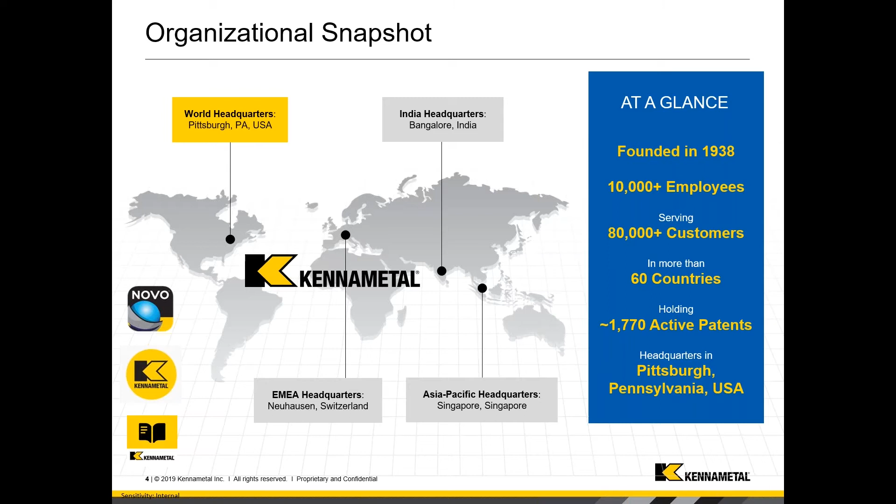But for the sake of time, I would like to go straight to the subject today. So we are going to talk about solid carbide end mills, and specifically roughing, which is the most challenging application. Also finishing sometimes has some tricks or issues, but the roughing is really where we have the highest time in cut, where we need to face some challenges. I like to call them challenges instead of issues or problems, because a challenge we can overtake. So let's see, talking about conventional milling, roughing.

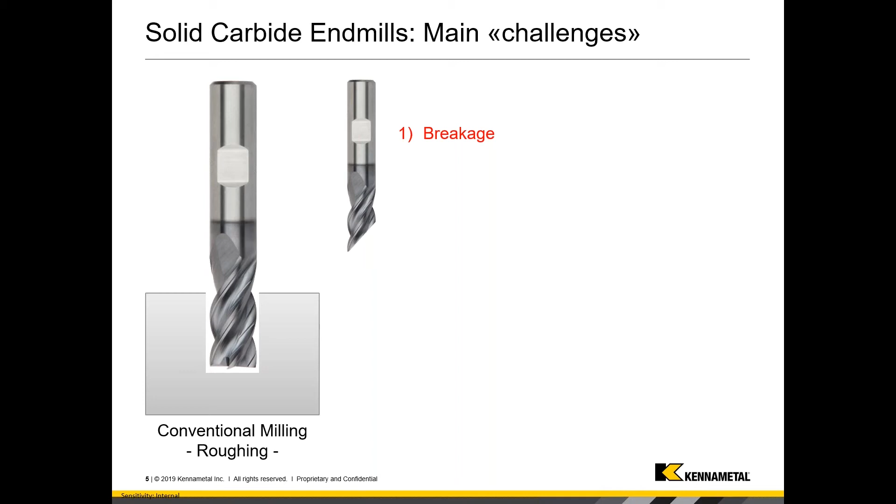I would say the first challenge we have to overtake is the breakage of the tool, especially when we are working after minutes or hours of work. The cutting forces and the wear are going to increase, and unfortunately it's also common to see a breakage with conventional milling. Another important topic is the deflection of the tool. We need to think that the end mill is constrained by a chuck at the end. Let me put my laser pointer to explain what I'm talking about. So we have a chuck here that constrains the end mill. The longer the overhang of the tool, the higher the deflection according to the cutting forces in conventional milling.

Another important topic to be evaluated is the edge stability. When we are doing roughing, especially in full slot, the edge of the end mill is the first to suffer due to breakage or damage of the corner. And of course, this will have an impact on the tool life in general. Then also chip evacuation, especially when we are doing pocketing or internal applications, if not managed properly, could be an issue from the recut standpoint. And if we recut the chip, we go back to the first challenge, which was the breakage.

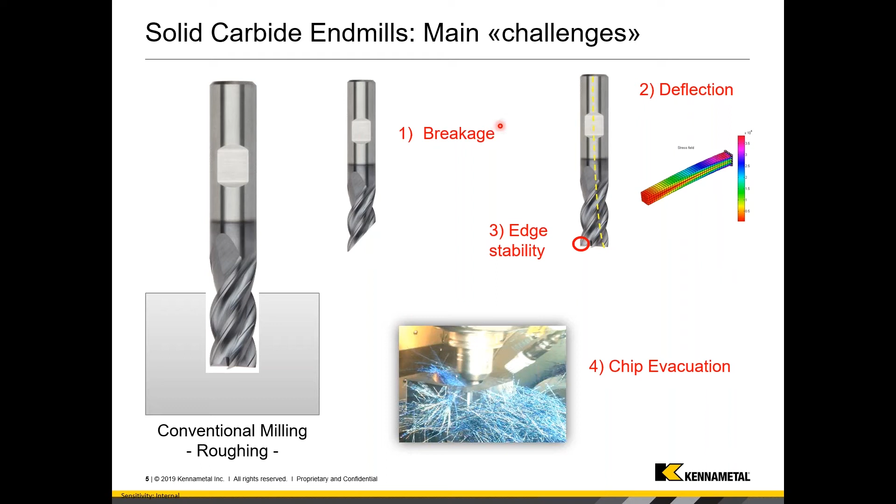Of course we may have other challenges, but I consider these the main four, and we can summarize all these challenges in one single sentence: process reliability, which is very important when you use critical dynamics. Yeah, absolutely. Gianfranco, I like the concept of challenges because we want to find solutions to these challenges. And I know that Kennametal has been looking at these challenges for a while. So could you tell us something about the solution that you are proposing? Absolutely.

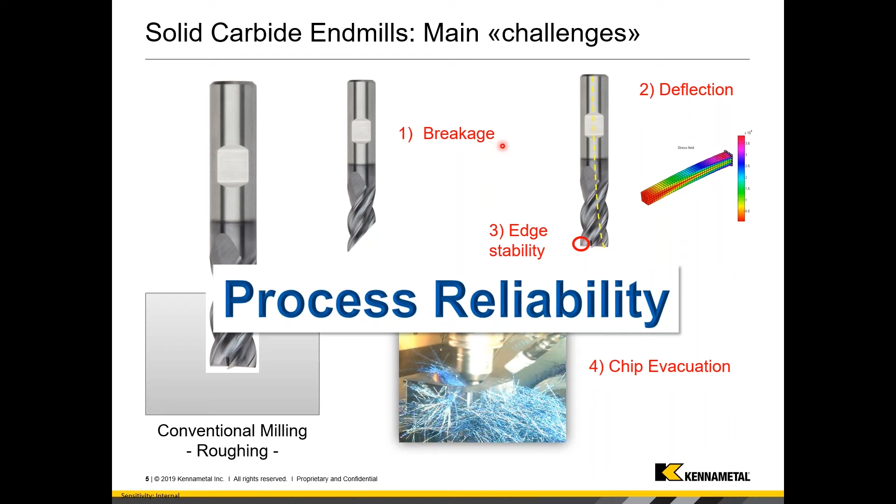So Luca, thanks for introducing the next slide. So we need to keep the focus on the reliability, because reliability can drive productivity and reduce the complexity also. So what we need to do, from my point of view, is change approach. We need to change machining strategy.

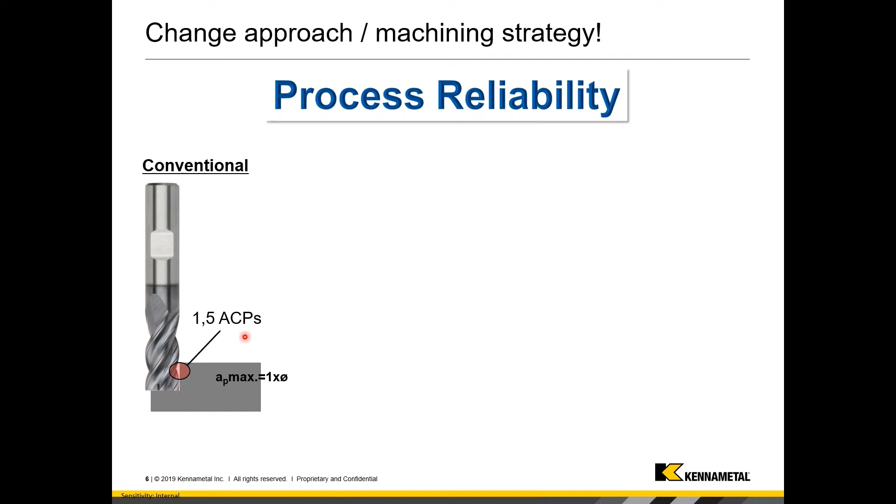So still on the left, you can see a scheme for the conventional milling, where it's clear that we have a large radial engagement and limited axial depth of cut. When I say change approach, that means we need to change the way we machine the workpiece. And this is the perfect introduction of dynamic or high velocity milling, where we basically change the idea, increasing the axial depth of cut, reducing the radial engagement.

In doing this, as you can see here on the benefits of dynamic milling, we can definitely, and it's easy to understand, reduce the cutting forces and reduce the pressure. We are for sure going to reduce the radial engagement, but we are going to use the entire cutting length of the tool, which in the case of the specific tool for dynamic milling, we can push up to 5xD in axial depth of cut.

We are going to reduce the vibration. We are going to preserve the corner stability as well. We are going to reduce the temperature during the application. And all these benefits are listed as a plus against the conventional milling, where the only plus is the bigger radial engagement. At the end, it permits us to increase the feed and speed, so to boost our cutting conditions during the application. That means increased productivity and metal removal rate, as well as process stability.

Another important point: when we go deeper in axial depth of cut, we have more axial contact points, as you can see here. So the cutting edges are more in contact with the workpiece, and this also limits the deflection of the tool itself. So we can list a lot of advantages, but I would like to highlight the cutting conditions, the productivity, and last but not least, of course, the stability and the reliability of the process.

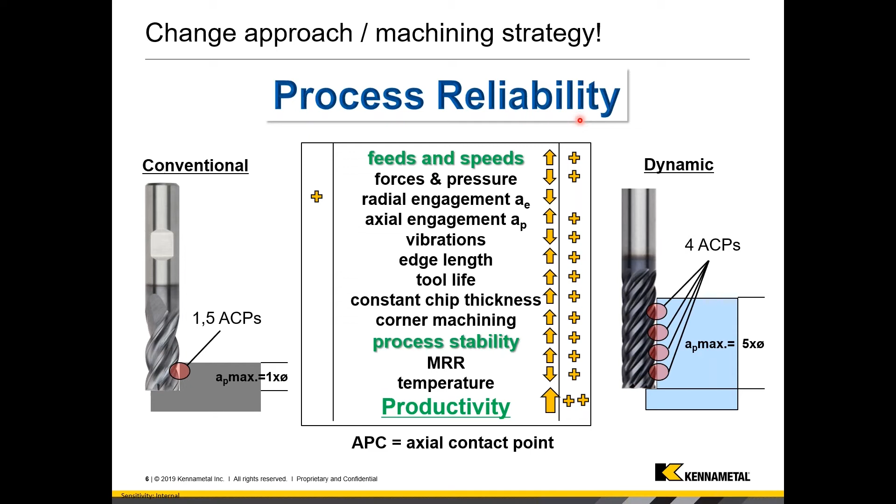Okay, so to explain this, I created the next slide, where we go to the basics of milling. It's not going to be a technical training today, but I think it is important to understand the concept behind the relation between the radial engagement, named ae, the cutting speed Vc, and the feed Vf. There is a relation that links them all together, and it's quite clear to understand. You need to think about the radial engagement defining the time in cut.

If you now see this picture, it's quite clear that when I increase the radial engagement, the cutting edge is in touch with the material for a certain time until it exits the material. So the larger the radial engagement, the higher the time in cut. When I have a higher time in cut, of course, I'm going to increase the friction between the solid carbide end mill and the material. The friction will generate heat, and the heat is going to generate lower tool life. There is really a strict correlation between the temperature generated and the radial engagement.

So using a small radial engagement, I can increase the cutting speed drastically, because the temperature generated is going to be lower. So I can boost the cutting speed. And of course, we know that for the cutting condition calculation, cutting speed is extremely important. Increasing the cutting speed will land with a higher feed at the end of the day.

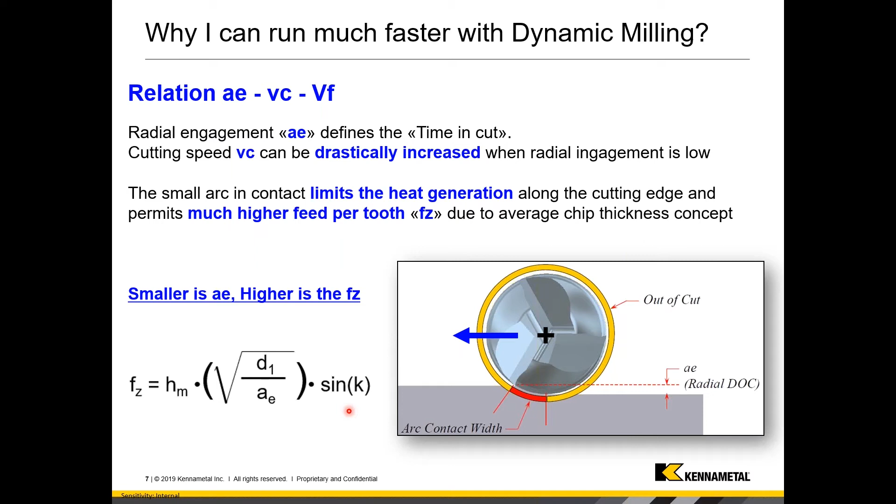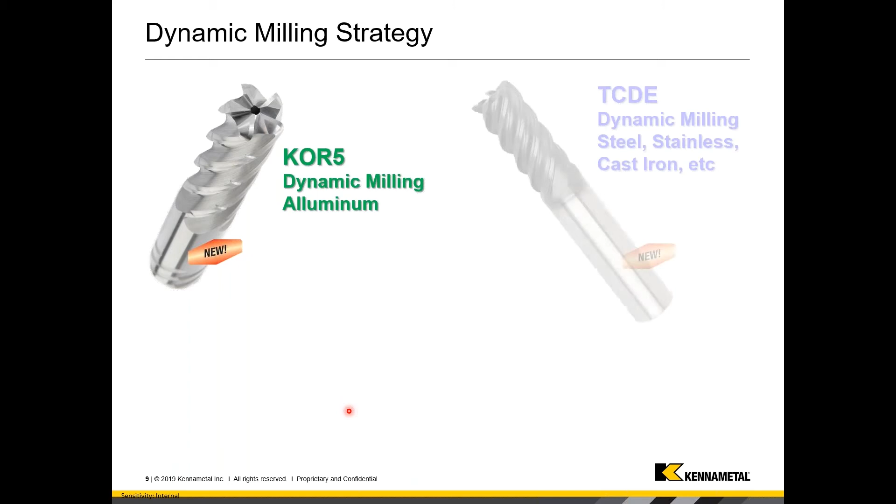So we have the KOR5 for dynamic milling aluminum. It was the first cutter with 5 flutes for high velocity on aluminum. Then we launched as well the TCDE. That was the first dynamic solid carbide end mill launched by Kennametal, and this was our weapon to go on steel, stainless steel, cast iron, so in general on all the materials. So with these two products, basically we can cover all the material that we can find on the market.

But last but not least, as a highlight to give you a pre-information, a new and outstanding cutter is going to come soon. The picture is a little bit hidden because we have not yet launched, but something new is going to come very soon that will help the material coverage. Okay, is it still top secret, or can we have some data about this tool, the release of this tool?

Well, probably I cannot say too much, but in general, if you link the color of the text to the material according to the ISO, you can simply understand that it's going to be a new solid carbide end mill focusing on difficult to cut material, with very unique features. I cannot say more, but let's think about when titanium or nickel-based alloy will be in the arena. So we may have something new. This will be the tool. Okay, got it. Thank you. You're welcome.

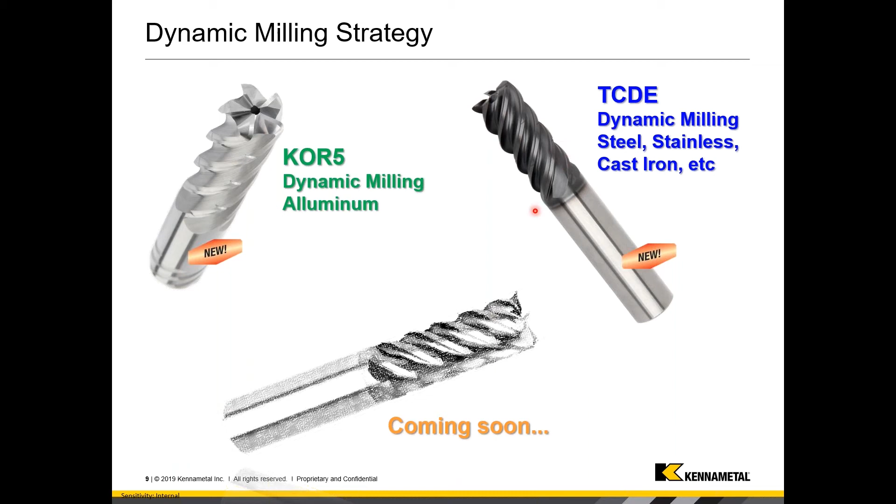Okay, guys. So what I wanted to do very quickly, I would like to provide a couple of highlights on the already launched platforms, the KOR5 and TCDE. As I said, the KOR5 is a kind of unique cutter for aluminum. We have an optimized helix angle of 35 degrees for this kind of material. The length of cut in general is 3 times D, but with a simple custom solution, we can go easily up to 5 times D, but standard is 3 times D.

So we have 5 flutes, unequally spaced. The internal coolant capability especially is a feature very important when we are going to do pocketing. Also the core of the cutter, and this is something very similar when we talk about dynamic solid carbide end mills, is generally stronger or larger compared to the standard solid carbide end mill, because we want to engage more axial depth of cut.

That means we may have deflection, and adding a specific proprietary core design will help us to reduce the deflection. Then, of course, extremely important as well, always something to manage the chip evacuation. On the KOR5, we have chip breakers specifically designed to machine non-ferrous material. On the TCDE, we have a chip splitter, same logic, but slightly different design.

On the sharp edge, we have a sharp edge and the corner radii versions. And on the sharp edge, you also have the wiper facet included, because sometimes it's also important after the roughing to make a kind of finishing application, and you can do that as well using the KOR5. It's not just the roughing tool, which is the main feature of this, but if you want, you can also achieve a decent or good surface finishing.

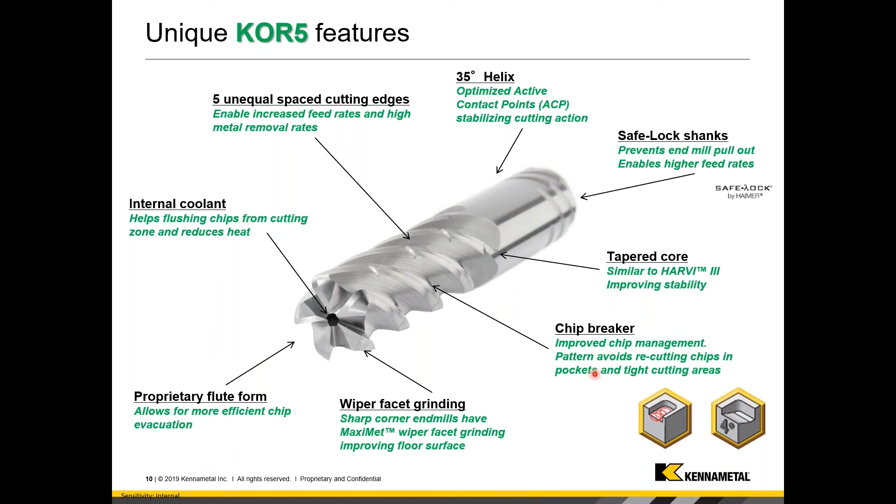Going to the TCDE cutter, it's basically starting from the same logic, 5 flutes, unequal flute. So here we have changed the helix angle from 35 to 40 degrees because, of course, we have higher cutting forces on steel or cast iron, whatever. So that means the higher the helix angle, the lower the deflection, because the helix angle helps you to reduce the radial forces and to increase the axial forces. So less radial force will lead to less deflection.

We have 3 times and 5 times D length of cut. As said before, the core is unique and designed to machine with lower radial engagement. So the suggestion is a maximum of 10% if you want really to go to dynamic or high velocity milling. The cutting edge is stronger. We have a tailored cutting edge that allows us to push the feed per tooth.

And then you have a specific chip former. So think about engaging this tool 5 times D. We are going to create a stress point in the material, and we are going to better manage the chip evacuation, producing 5 different chips instead of a very long chip following the helix. Okay. So also here, we don't have the center cut, but we have anyway the capability to go ramping up to 4 degrees.

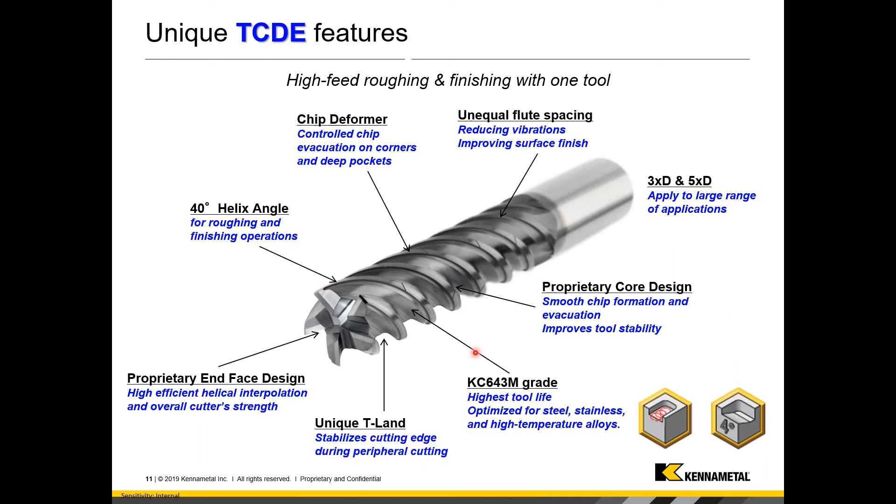Everything is good on the slide, without a doubt, but what we wanted to do for this webinar today is also demonstrate what we are talking about in collaboration with ESPRIT. We created a demo that I named from the slide to the real chips with the TCDE. So we are going to machine a P3 material, steel 4140, with a 4 flute solid carbide end mill, still Kennametal. So maybe you know the name RV1, diameter 12, with conventional milling, and make the same application using the ProfitMilling of ESPRIT software with the TCDE, the last cutter we saw before, diameter 12.

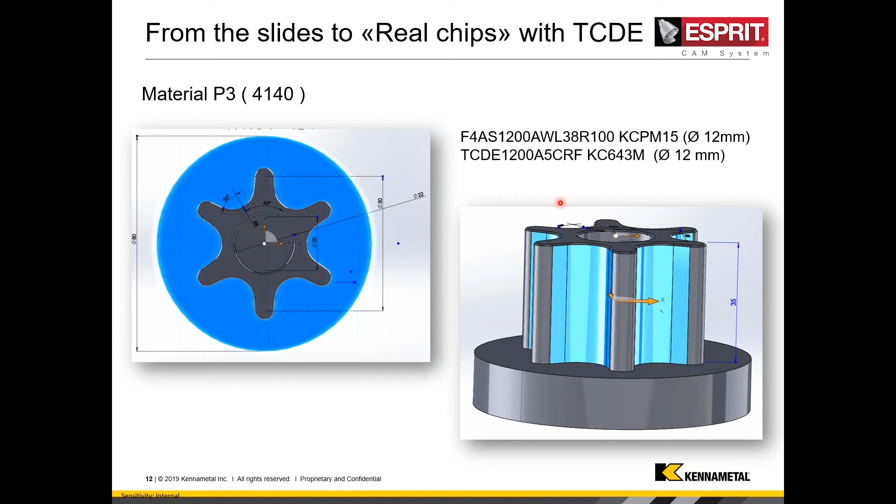As you can see, we try to maximize the length of cut according to the diameter. So it will not be possible to do one single pass with the conventional milling. So we are going to see how it works. Okay. So let me put this video without sound because you anyway will not be able to hear. Okay, these two videos will start simultaneously, and then we can debate about the cutting conditions.

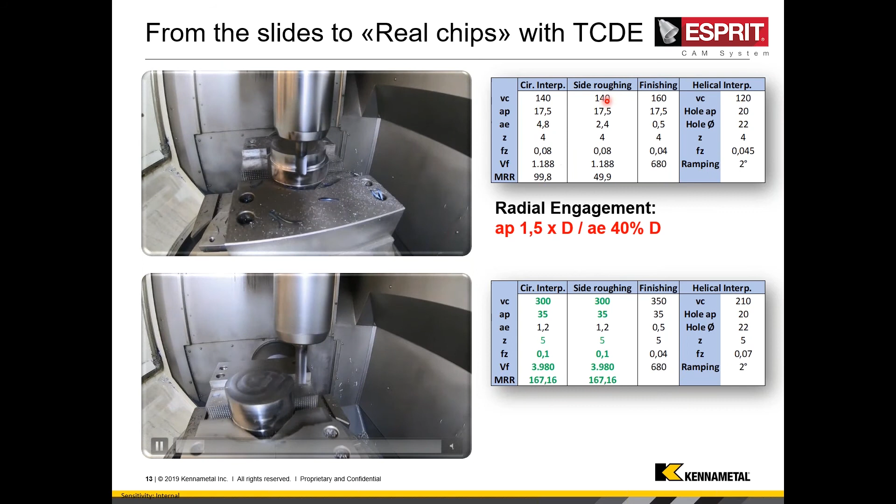So on top, you can see the conventional milling. And for the conventional milling, of course, we didn't want to use very conservative cutting conditions, okay? So we are going to use really realistic parameters: cutting speed 140, depth of cut, considering the 12 millimeter cutter, is 1.5 times D axial depth of cut with a 40% radial engagement. It's a pretty challenging application, okay?

On 4 flutes, 0.08 millimeter per tooth. So the feed is around 1,200 millimeter per minute, which is a pretty decent application, okay, in terms of cutting speed and feed. So if you see here where the TCDE is right now, it's already above that type of application.

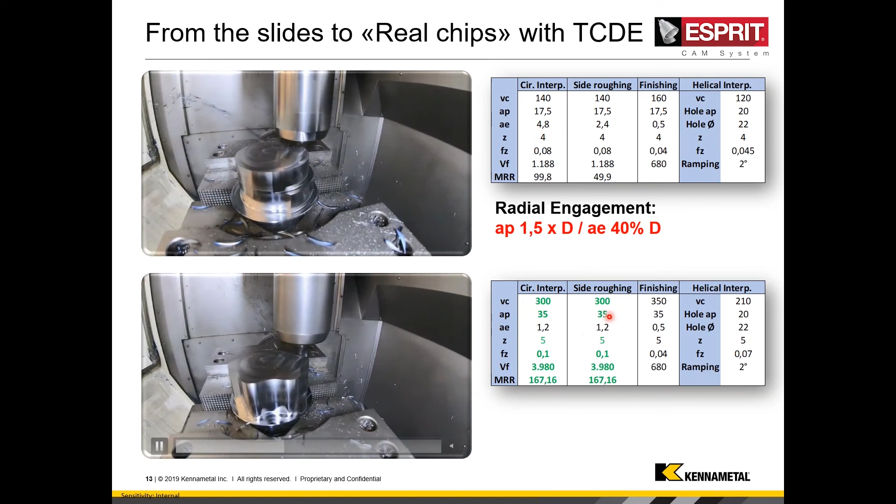Because we can do what I was explaining before, so 300 meters cutting speed, full depth of cut, 10% radial engagement, of course, adding one tooth more, 5 versus 4, we can push even more. The feed per tooth is 0.1, which is also still conservative, we can push more. So we basically pass from 1.2 to 3.9, almost 4,000 millimeter per minute, having a great advantage from the material removal rate standpoint.

So you can see here, and unfortunately, on the conventional, we also had to divide the radial engagement in doing this kind of application, because 40% radial engagement on this application specifically was too high. So we decreased to 20% to be on the safe side. So basically, we are almost at the end.

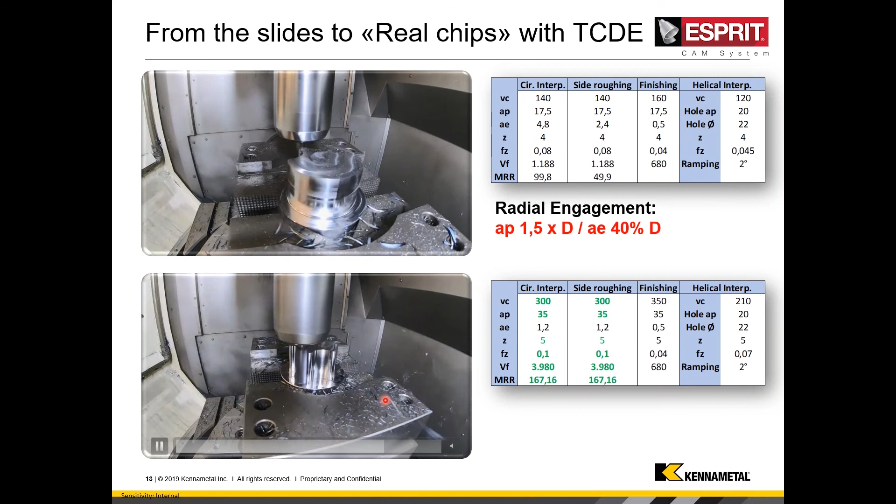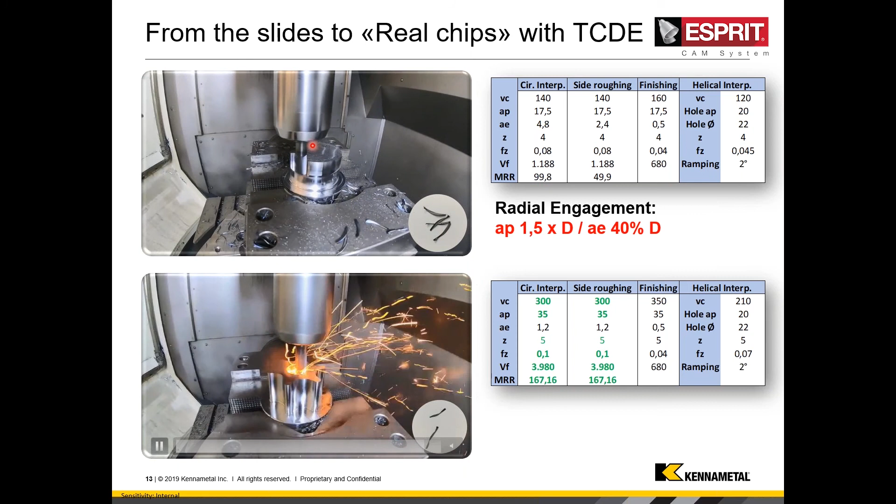And then my partner, Andrea, will explain exactly how we made the program here to really boost the dynamic milling. Now the last application is doing the helical interpolation. So it's important also to mention the dimension of the chip. On the external, you don't have any issue. But if you do pocketing with a large chip, it could be a problem for the chip evacuation. When we are dynamic, we are producing very small chips.

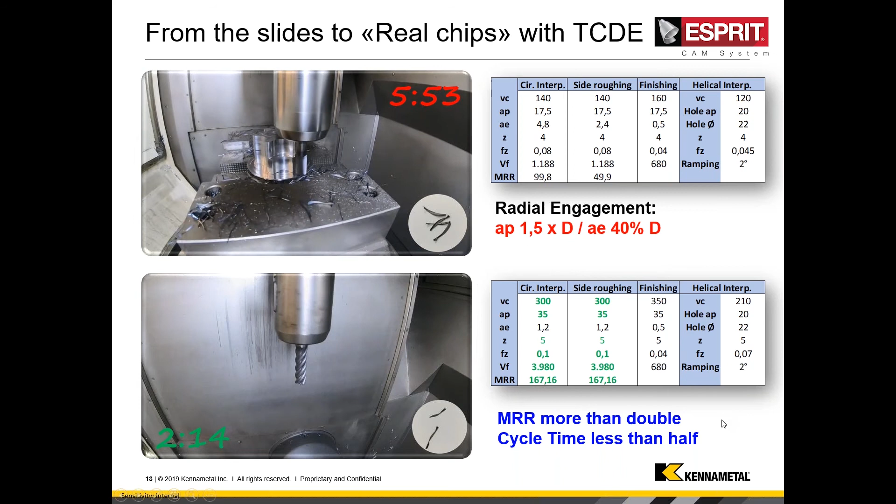So in total, the dynamic milling application was done in 2 minutes and 14 seconds. Here, of course, I'm not going till the end because it's quite long, but we know already that the time to make the same part will be 5 minutes and 53 seconds. So as the takeaway, more than double metal removal rate compared to the conventional milling, and less than half cycle time. So there are really a lot of advantages.

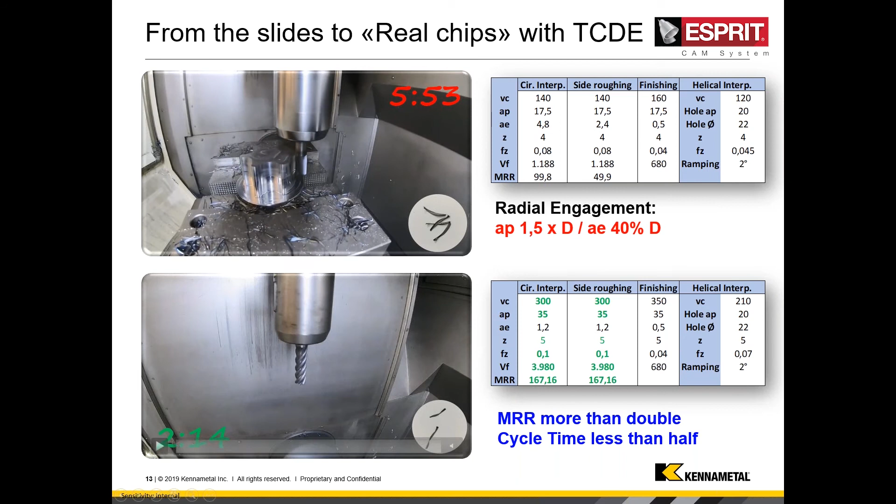And of course, here we are not measuring the tool life, but I am quite sure the tool life is going to be much longer also with the dynamic milling. So not just this, but also plus the tool life.

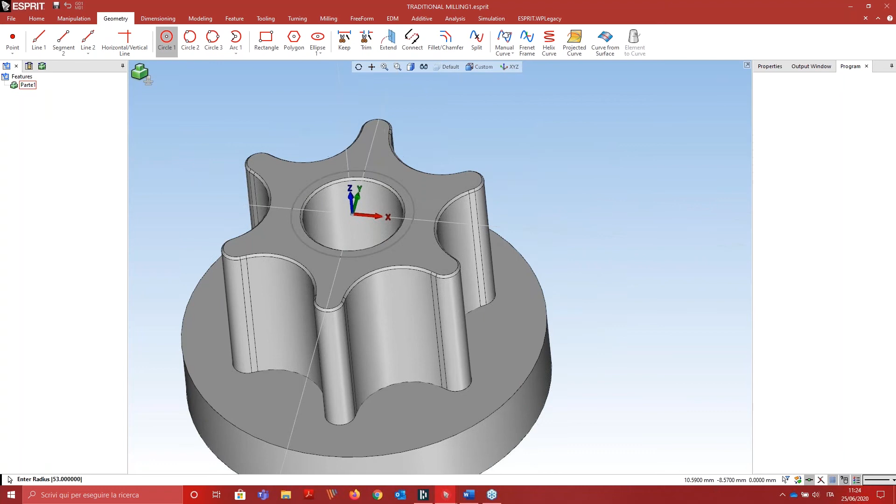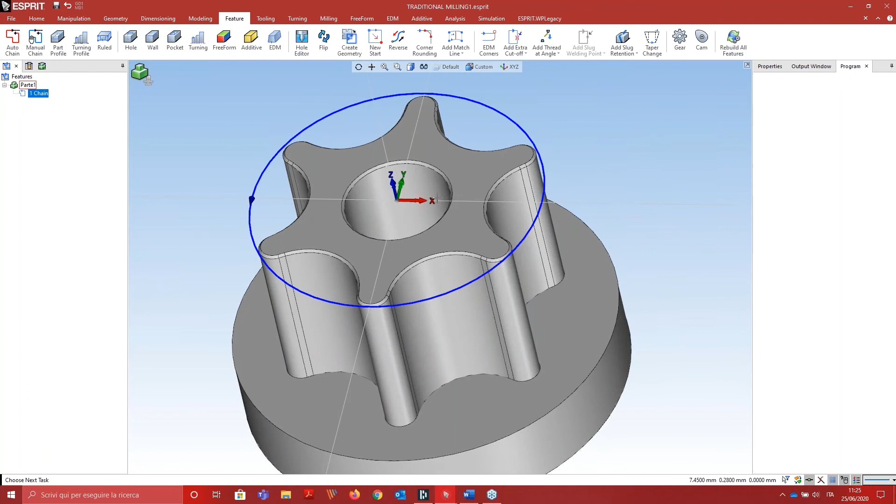First of all, the first operation is a circular contouring operation that you saw in the video. I make geometry for this, for example, from the center. Okay, this is the circular feature to make my operation chain, and I program this contouring operation from scratch. I program with traditional milling. I set default to all my parameters, and I make circular contouring. Okay, I choose my tool.

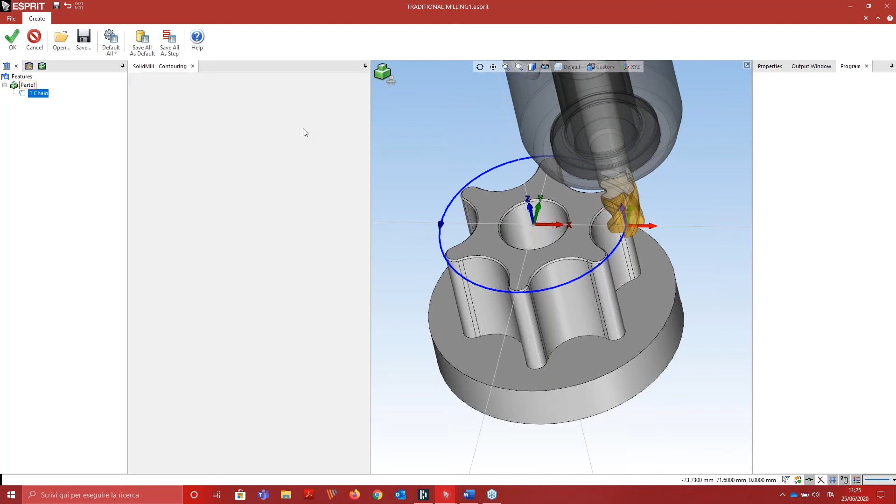It's a four cutting edge tool, end mill. Of course, you can see the preview of the tool and the tool holder also, the shape of the tool and also of the holder. Cutting parameters like this, 0.08. And I want to use the stock automation for calculation.

The strategy, I have to manage the step over. I take 40%, which is 4.8 of step over, and I want to have 35 of depth with 1.5 times the diameter as incremental depth. Okay, and calculate.

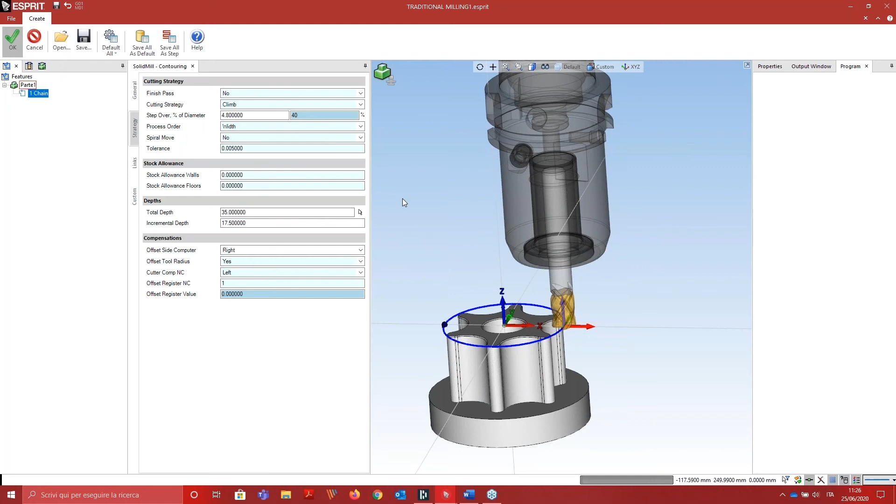I have already mounted my fixture and workpiece on the machine. I have used a DMG Mori DMU 75 monoBLOCK. You can see the machine. For ESPRIT, the simulation is very important because we have exactly the real machine. We have a digital twin of the real machine. It's very important to avoid collisions and to avoid eventual out of stroke in the operation.

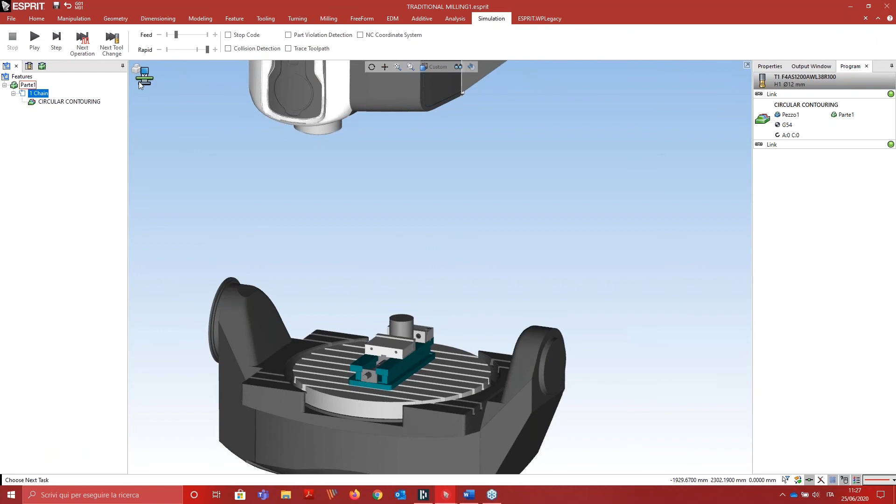Okay, let's start with simulation, like the video you saw, the tool, and start. On the right of my screen, you can see the axes, like the control of the machine, and also the elapsed time to have an idea of the cycle time, and the value of the axes. You can see also the feed motion, the feed rate.

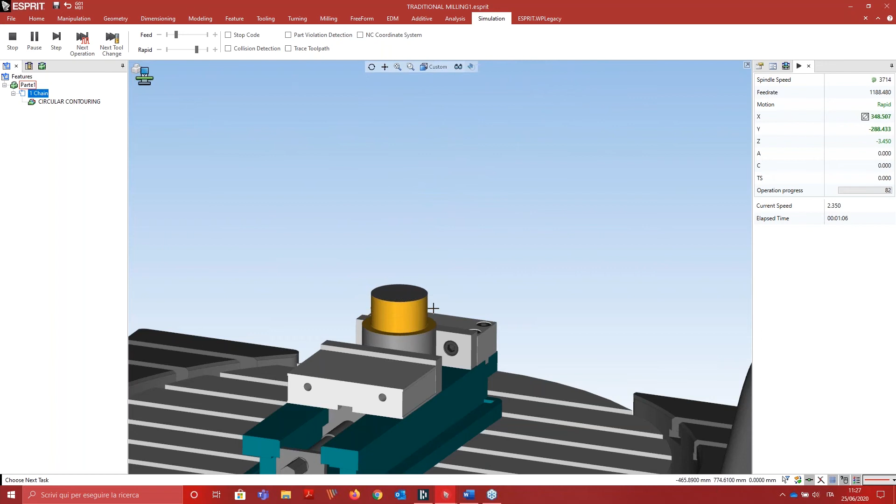There is a difference between this program and the video you have seen. I changed the priority of my work. It's not width but depth. Okay, directly on simulation, and I have the contouring operation equal to the video. Accelerate a little bit and so on. Okay, just 1 minute for this operation.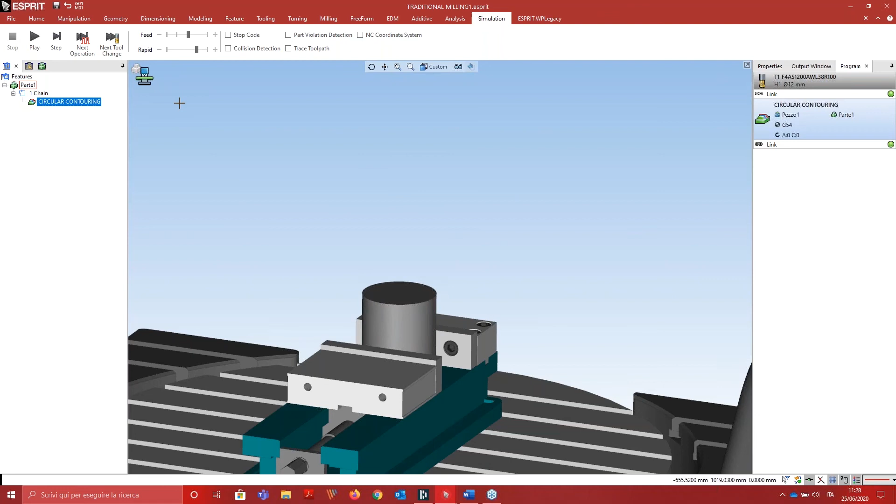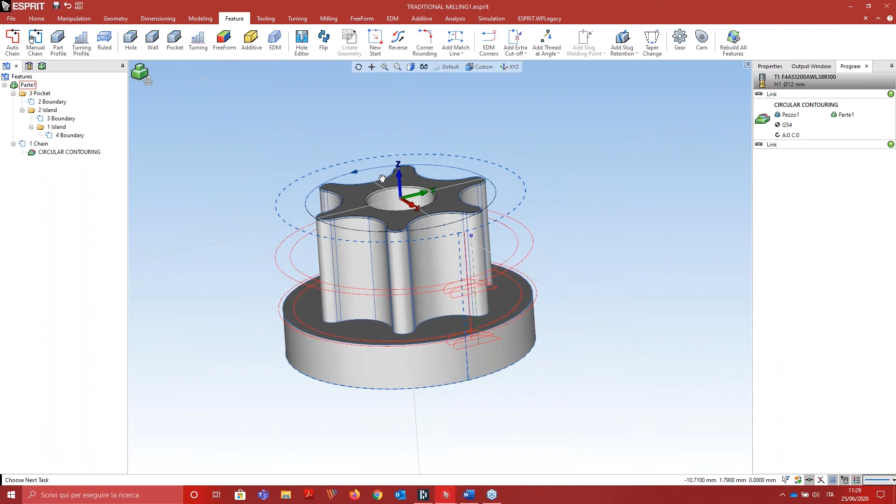Now I want to remachine the lateral side of the workpiece. I choose the whole solid model, and I have a pocket feature, and in this the system automatically detects the geometry of my part. I have all the geometry of my part, and I can erase this hole. I have to make it later with a spiraling cycle.

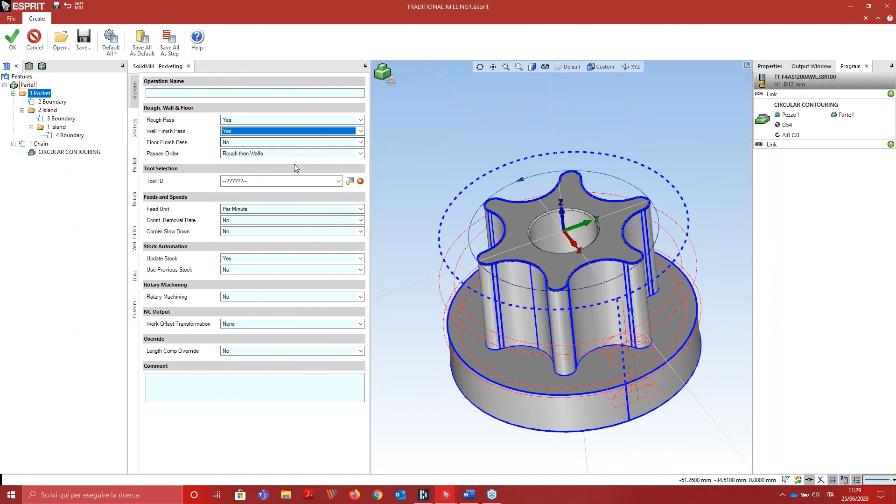Okay, milling of this with a pocketing cycle, and I set default to all parameters, and I choose to rough this, and also a wall finish pass in my strategy. I choose the same tool. As usual, I have the preview of the tool, and I use the stock automation also. And for the strategy, I choose concentric in. Total depth equal 35, and the incremental depth equal to the contouring operation. In the rough, I have parameters.

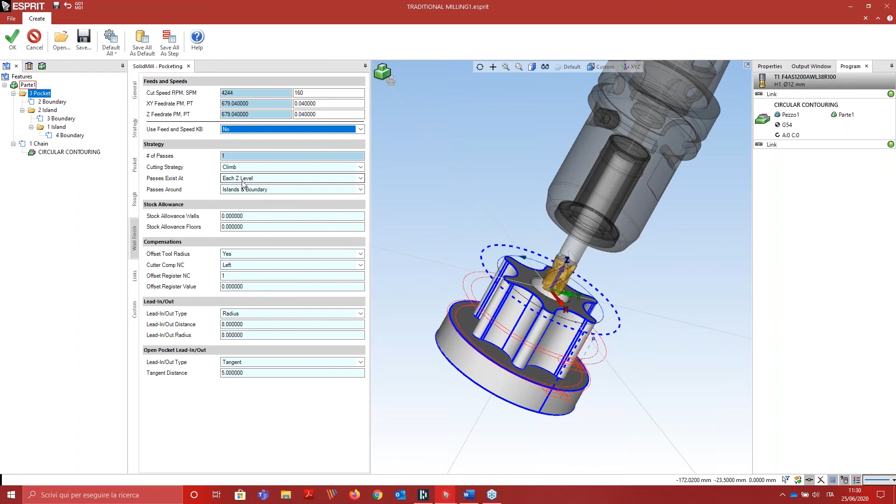Okay, and I change the radial engagement. I change the step over for the radial engagement, 1.2, for example. Stock allowance 0.2 for a finish operation, and parameters for the finish operation automatically in the same cycle, 0.04 and 0.04. Okay, and I want to make a finish pass at each Z level of the roughing. I validate. Okay, and I have my cycle.

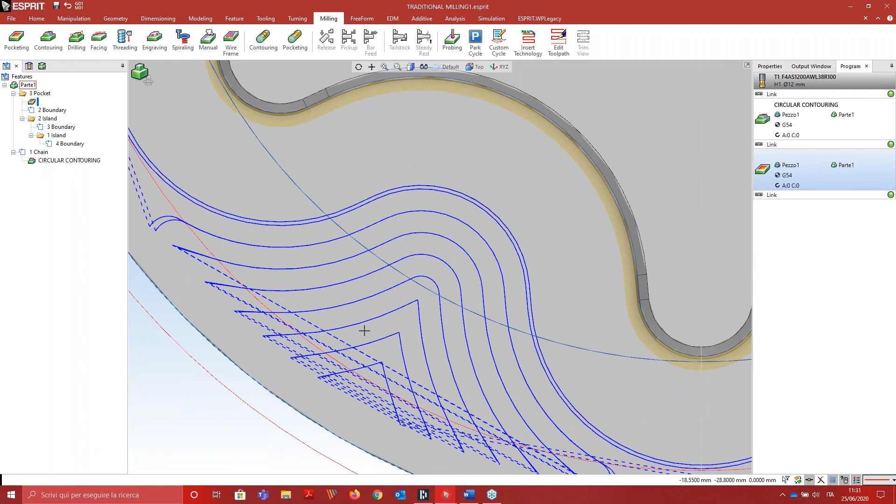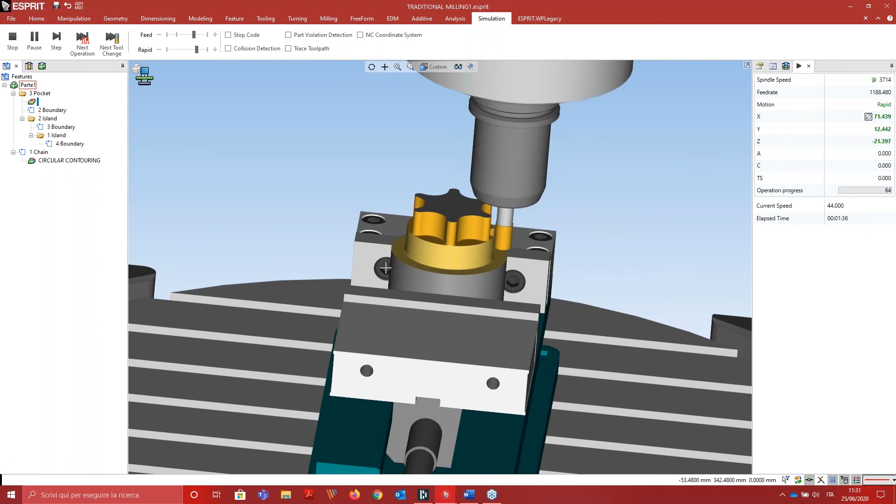You can see the shape of the movement. You can see here a sharp corner in the movement of the tool for the first movement of roughing, but now directly on the simulation. Okay, I have the same tool, but you can see different color for a better visualization of your work. Okay, I can increase my feed rate. Okay, and the second depth. This operation is a little bit long. Okay, finish pass, and so on.

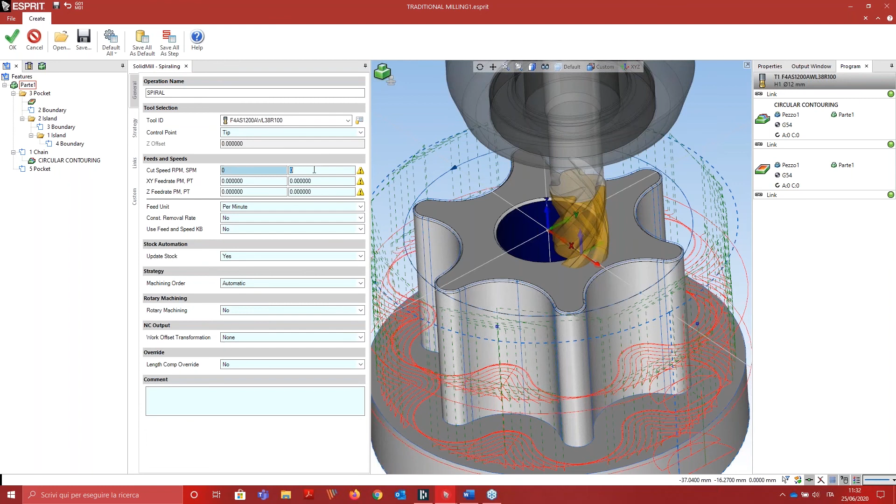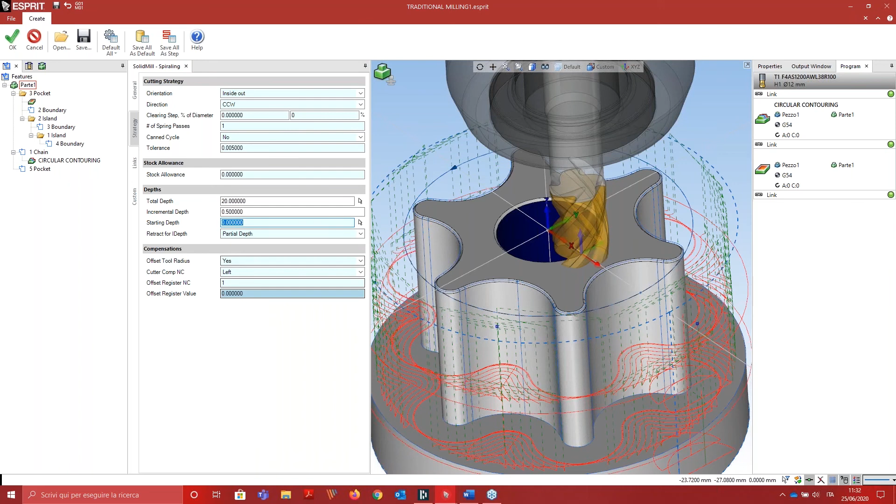The last operation, I want to machine this with a spiral milling, spiral cycle, and it is very simple. I have only to define my tool, for example, the same tool, parameters 7 and 0.07. And simply I have to decide the depth, of course, 20 millimeter, for example, and the incremental depth or the angle for the spiral, 0.5 incremental, and go. And I have the spiraling cycle.

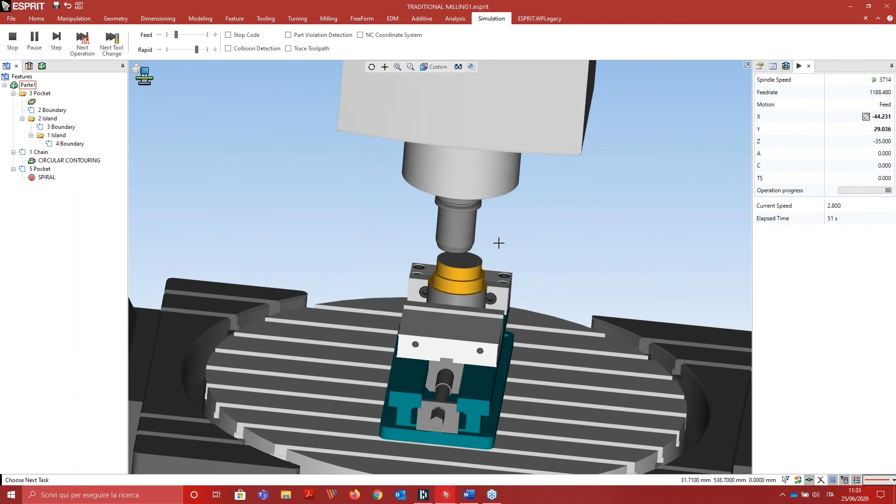And now I can simulate the whole process. Okay. The movement between the tool change and the workpiece is automatically calculated to avoid collision and to have the better tool path related to the movement from tool change and to tool change. I accelerate my simulation. And at the end, we can see the elapsed time of my process. Okay, let me accelerate it a bit. Okay, now the spiraling cycle.

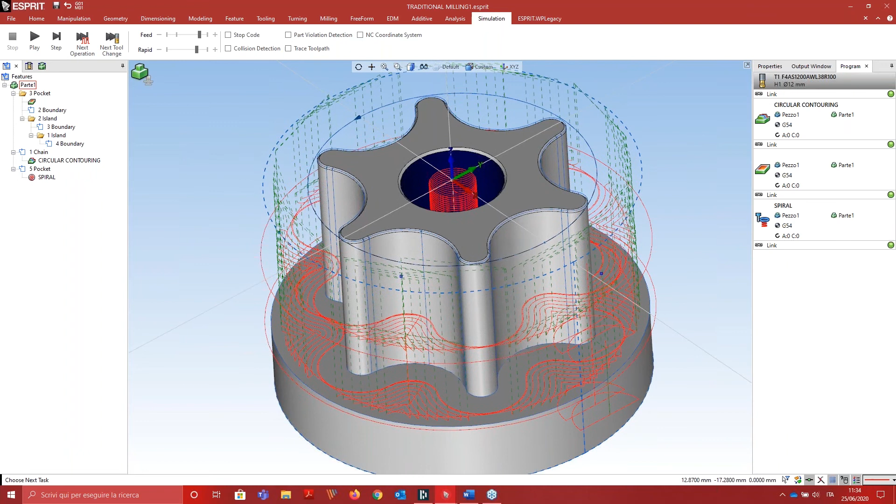Okay, it's done. And you can see the elapsed time at the end of all operations is 5 minutes and 53 seconds. Okay, now we have to optimize this cycle time with dynamic milling. Dynamic milling in ESPRIT is named ProfitMilling. ProfitMilling is a patented cycle of DP Technology. To do this, I can erase my circular contouring, and I want to modify my rough operation.

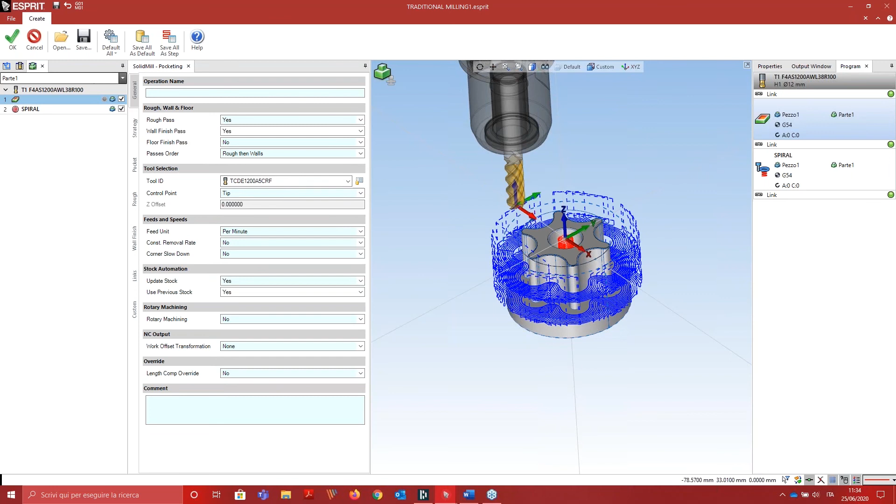Okay, I simply change the tool with a TCDE tool, and I change the strategy, not concentric in, but I choose the ProfitMilling. Okay, the system automatically manages the parameters for ProfitMilling. I just have to decide the incremental depth. I choose all the cutting length, 35. In the rough, I have another important parameter. I have to change parameters 300 and 0.1 per tooth.

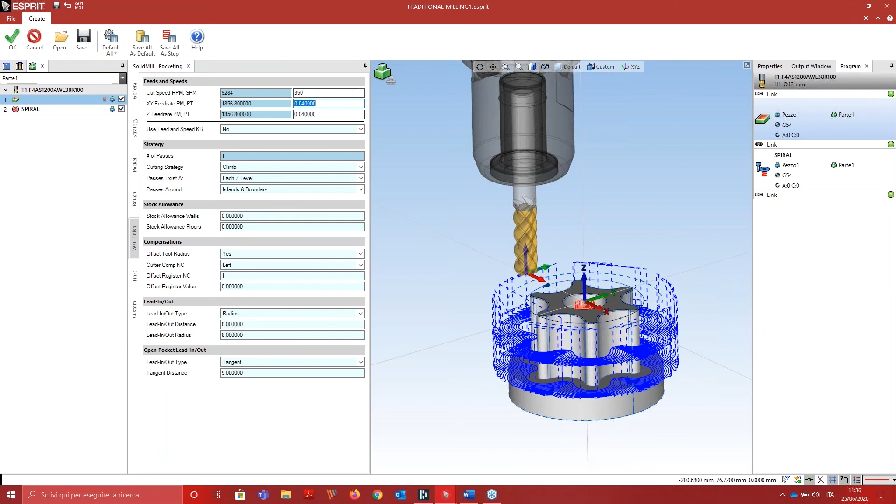Okay. I have a maximum feed rate, and I have another important parameter. This is the engagement angle. I can change the radial engagement, or I can change the engagement angle. For example, 37, and automatically the engagement changes. Okay. I have the same stock allowance, and I change the parameters also for the finish pass. For example, with the same feed per tooth. Okay, I validate. And now you can see the ProfitMilling cycle.

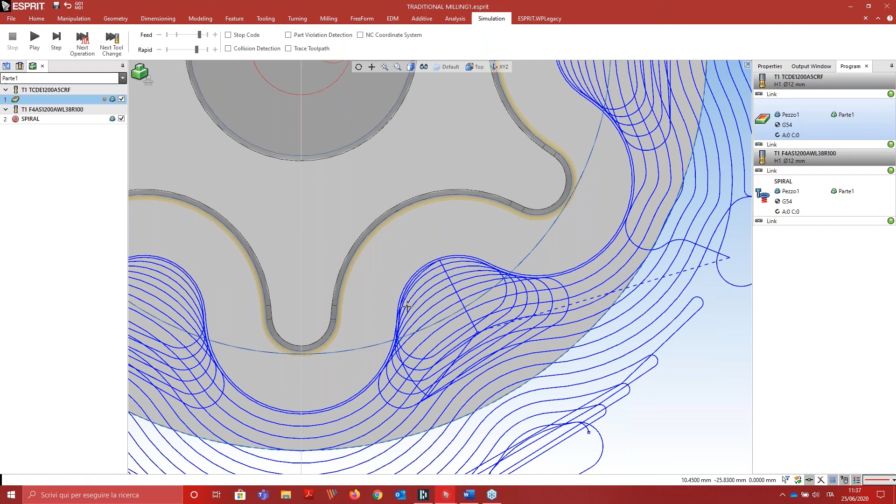What is ProfitMilling? It's a roughing strategy. It's a high-speed material removal cycle. And with this cycle, you have a smooth tool path, and you can have a significantly deeper, faster, and more efficient cut. And we have the possibility to reduce the wear on the tool and on the machine. How does it work? How is it possible to reduce the wear? Because the ProfitMilling cycle reduces the heat on the tool.

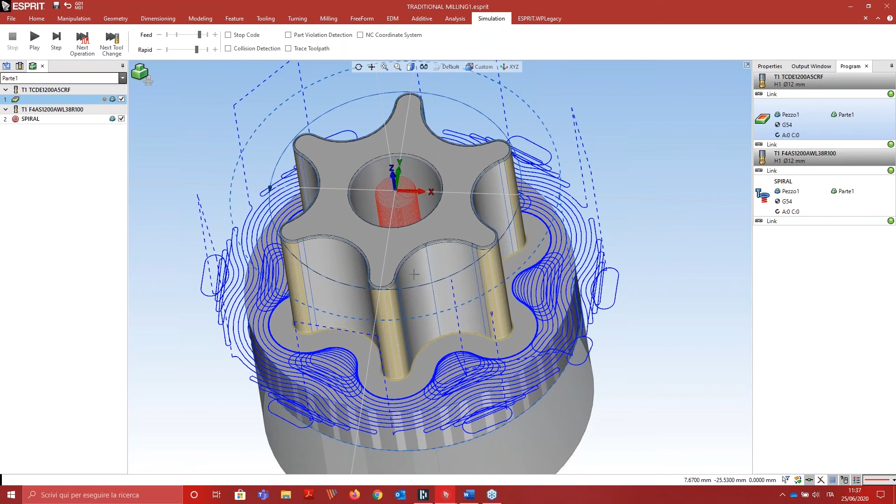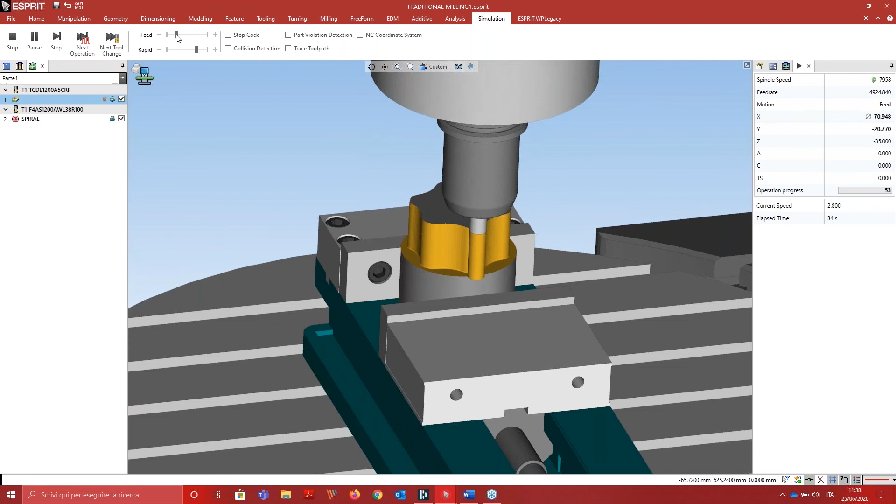Let's see the simulation. Okay, this is the simulation. Okay. When the tool starts to work, it reaches the processing temperature, and the temperature remains constant for the whole process. This is why the wear increased. Okay. The tool life increased, sorry.

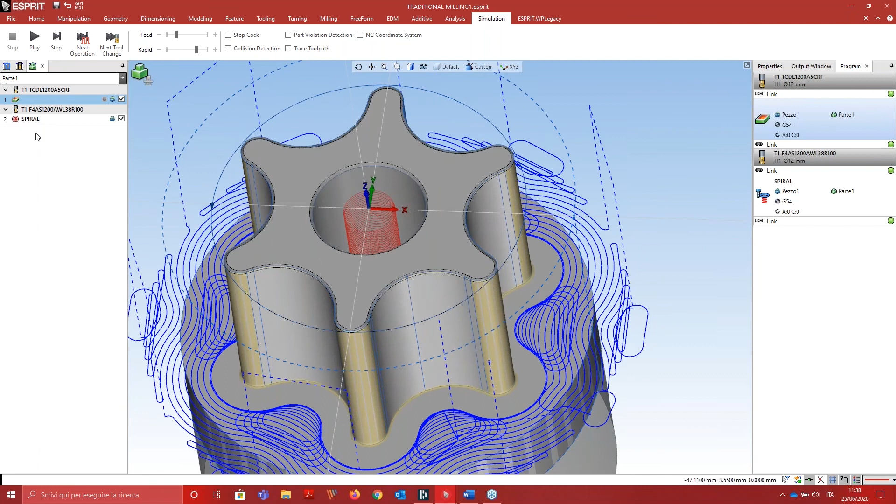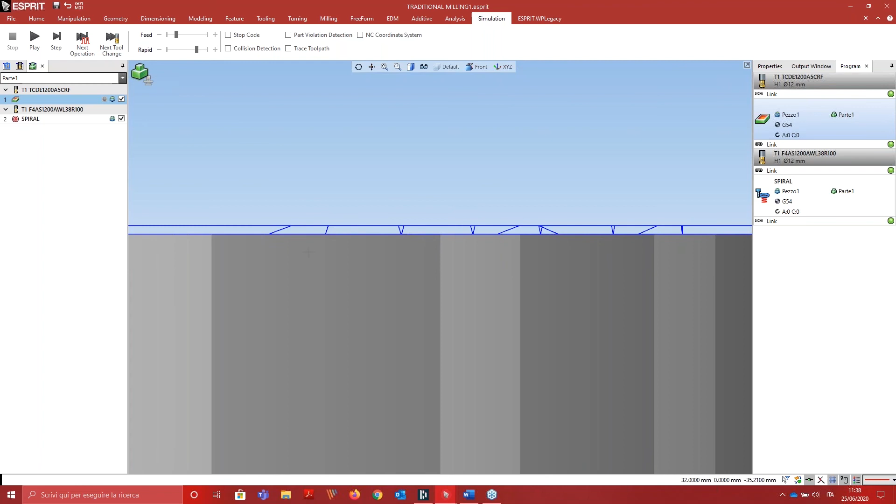Now I have to change also the spiral. Oh no, sorry, another important thing on the ProfitMilling. If you look at the tool path, you can see this movement in Z. This movement is 0.1 millimeter. It is a small Z directional lift to prevent the tool from dragging on the machined surface, and it is done automatically by the Profit cycle. Okay, now we change also the parameters for the spiral.

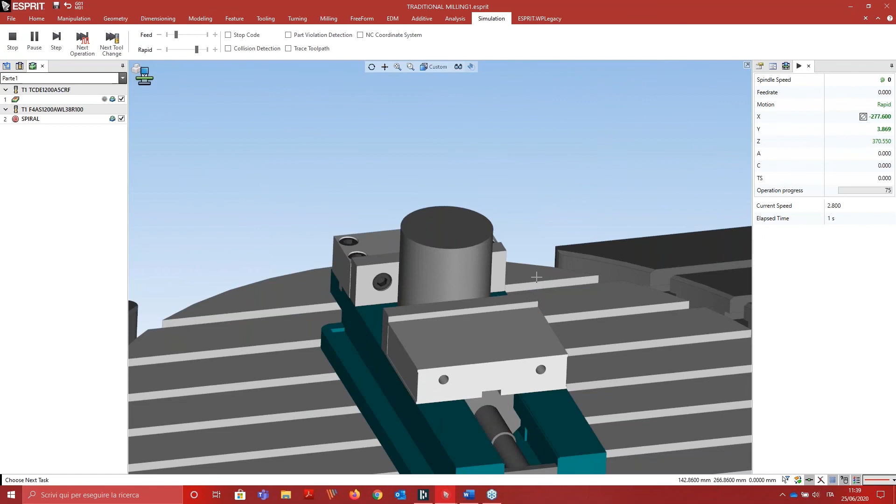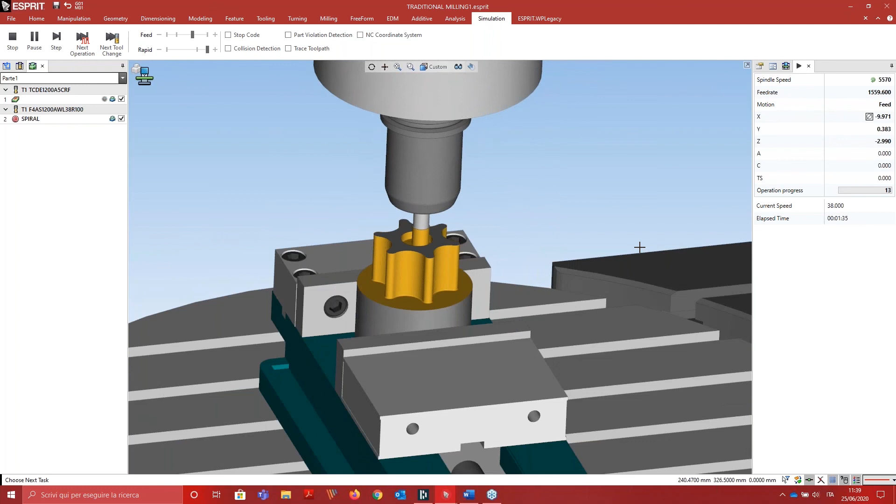Okay, validate and simulate, and have a look at the elapsed time. Now we can see a reduction of the cycle time due to the ProfitMilling cycle. Okay. We have the other cycle. Okay. 2 minutes and 23 seconds. Okay, excellent. Another important thing of the ProfitMilling cycle

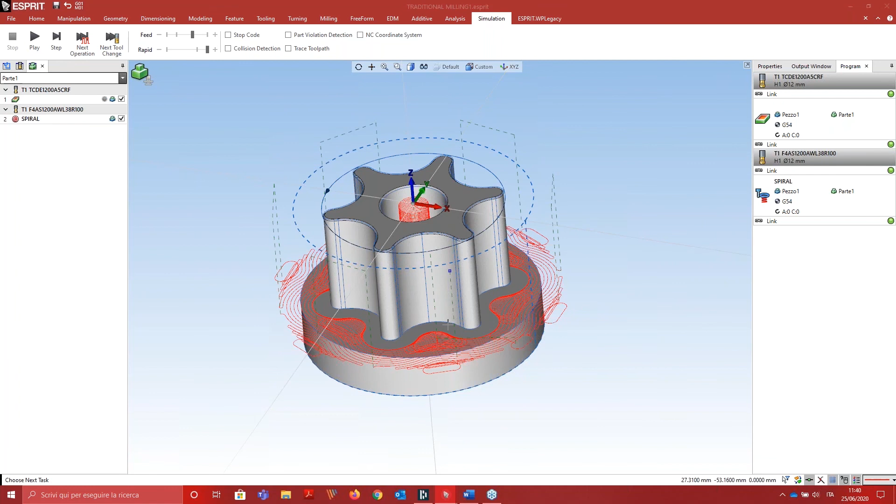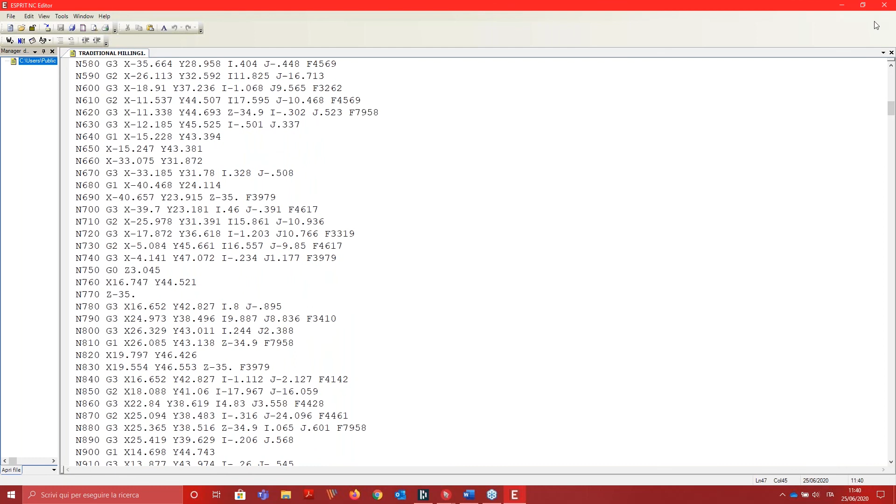is the continuous variation of the feed to maintain a constant chip volume per unit of time. If you look at the G code, for example, for this machine, this is the G code, you can see the continuous variation of the feed so you have a constant chip load and a constant load on the tool. This is a typical ProfitMilling cycle. Okay, this is done. Now I want to show you the behavior of the ProfitMilling in the pocket.

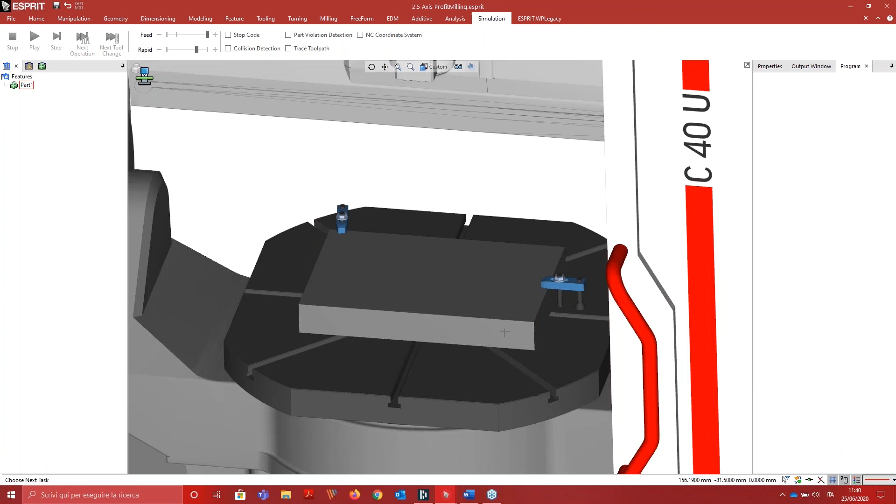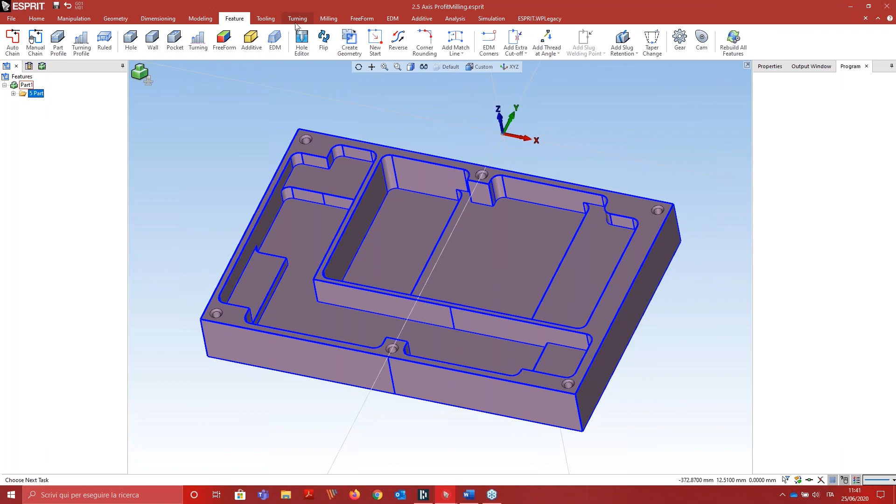Also for this workpiece, I have already mounted my fixture and my stock on the machine table. Okay, and I want to program this pocket graphic. I choose all my workpiece and go to feature pocket, and I have the geometry of the pocket and directly milling, pocketing, and with 2 or 3 simple parameters, I can manage my cycle.

I choose my tool, 20 millimeters TCDE. You have the preview as usual. And I use automation, of course. And the strategy, I choose ProfitMilling. The total depth is automatically from geometry, and I want incremental depth of 3 times the diameter of the tool. Okay, I have a parameter for total full engage, but I want to manage the ProfitMilling parameter, for example,

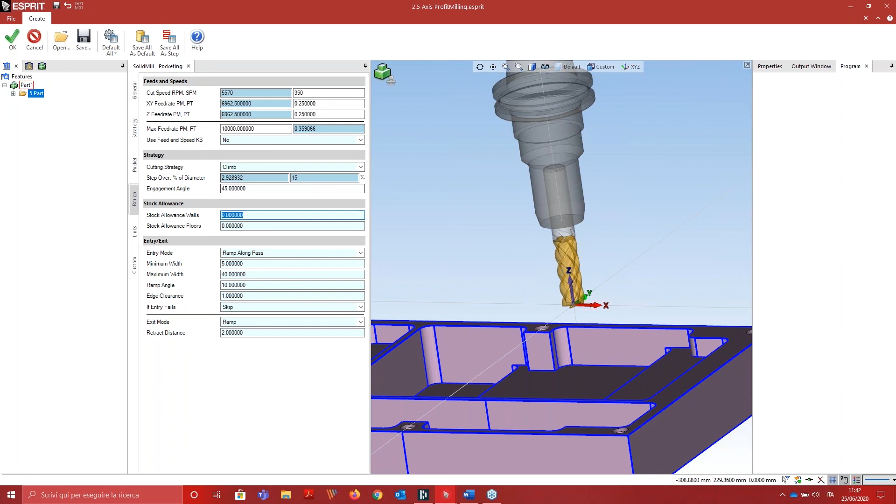350 meter, okay, and 0.25, 0.25, and this is the maximum. And a larger engagement angle, for example, 45 degrees. It's a radial engagement of 3 millimeters. And I want a helical for my entry movement. I just have to decide the maximum radius and the helical angle, for example, 2 degrees. Okay, and the system automatically decides where to make the helical entry.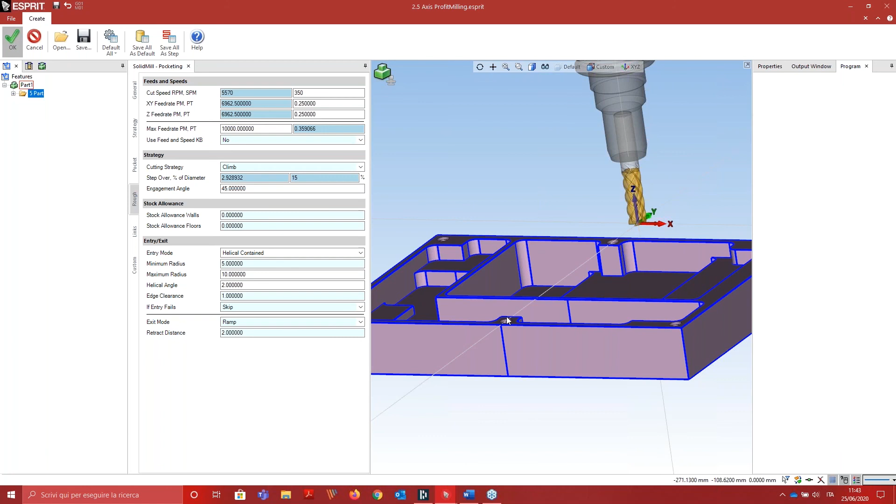Okay, go calculate, and this is the ProfitMilling cycle, and I want to show you the behavior of ProfitMilling in the corner. Very important for us is the corner picking. Remember, this corner has a radius that is smaller than the radius of the tool. But in the corner, the cycle makes a very smooth tool path to prevent chatter of the tool and to increase the tool life, for example.

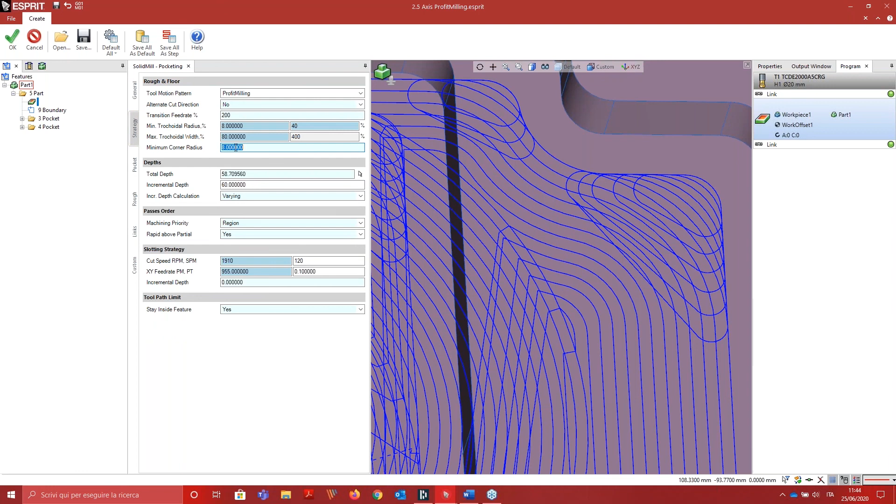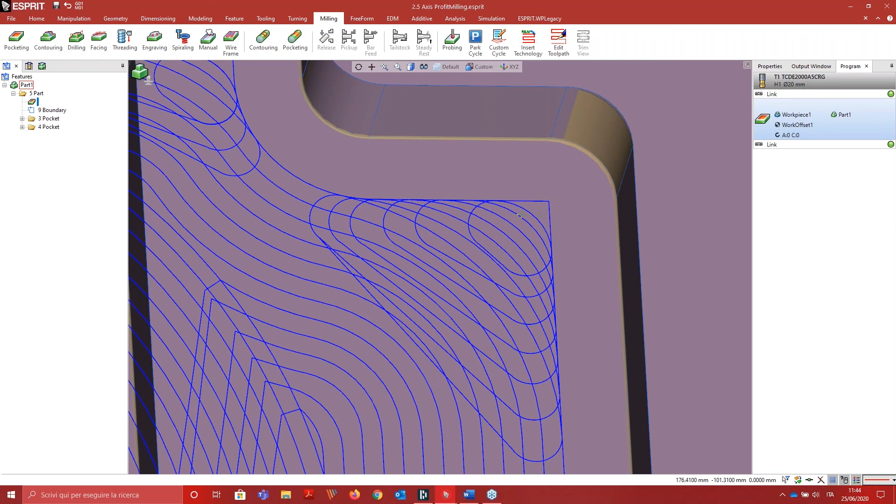Okay, this trochoidal movement is automatic, yes, but it's possible also to manage it directly in ESPRIT with this parameter. I can manage the minimum corner radius. For example, if I put it to 0 and recalculate, the last pass is 90 degrees on the corner. It's not good for the tool, but it's possible to manage. The cycle is totally automatic, but I can manage all the parameters.

Another example, if you look at the simulation, now I have a particular behavior. It's from top to bottom. The tool recognizes the geometry from the top and works to the bottom. It's not bad, but it's very long and produces a very long cycle time. Let me accelerate the process. Okay. Now level 1 completed. Now level 2, level 3, and so on. And this is more expensive in terms of cycle time.

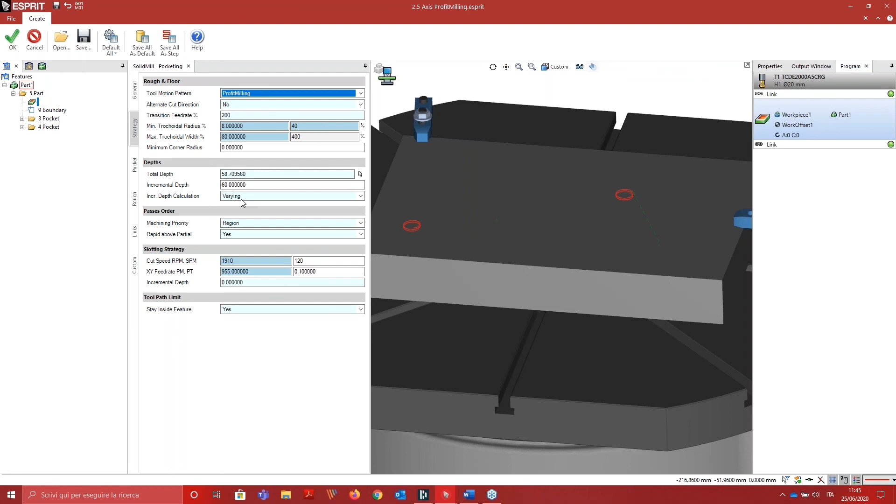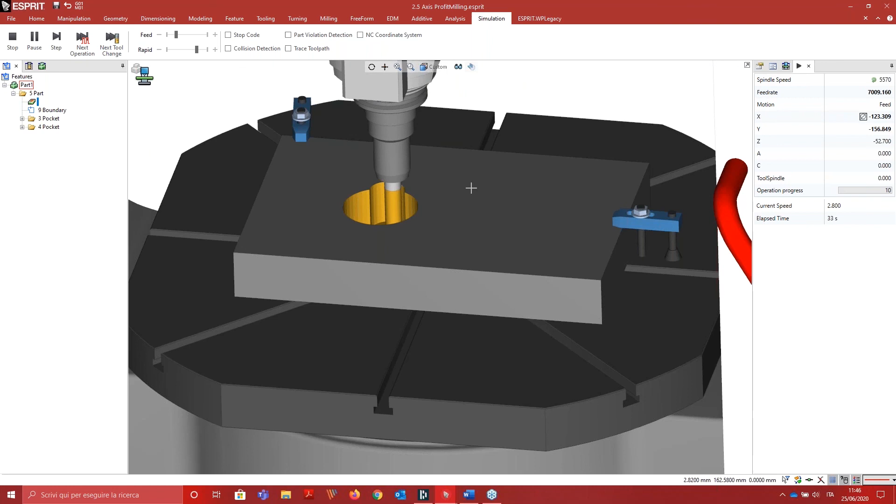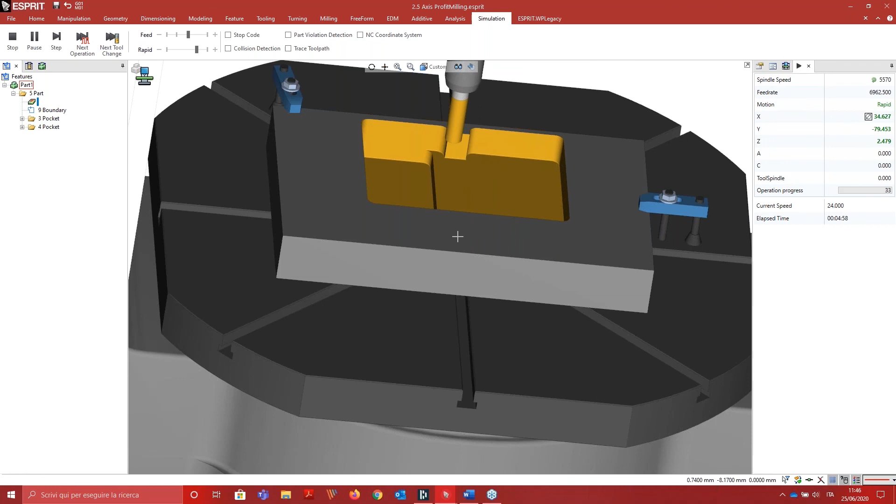In ESPRIT, we can automatically change this behavior from top to bottom into bottom up with only one click. The system recalculates and I can simulate. Okay. We see that it works at the maximum depth. And after that it goes back to clean only the area where there is still residual material. Let me accelerate a little bit. Okay. And this drastically reduces the cycle time, and you can get it just with a click.

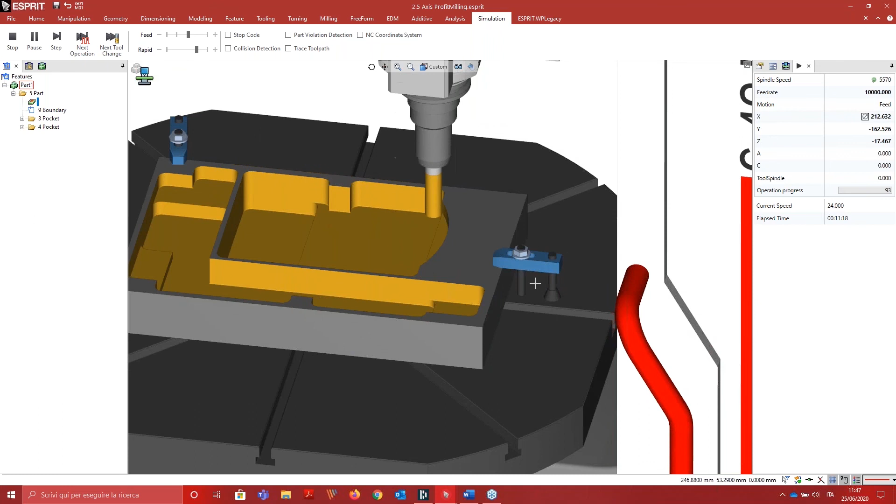The previous cycle time was 25 minutes. This is, I don't remember exactly. It's half the time of the first, I think. Yes, exactly. The first cycle time was 25. This is 12 minutes. Okay, this is the ProfitMilling cycle in ESPRIT.

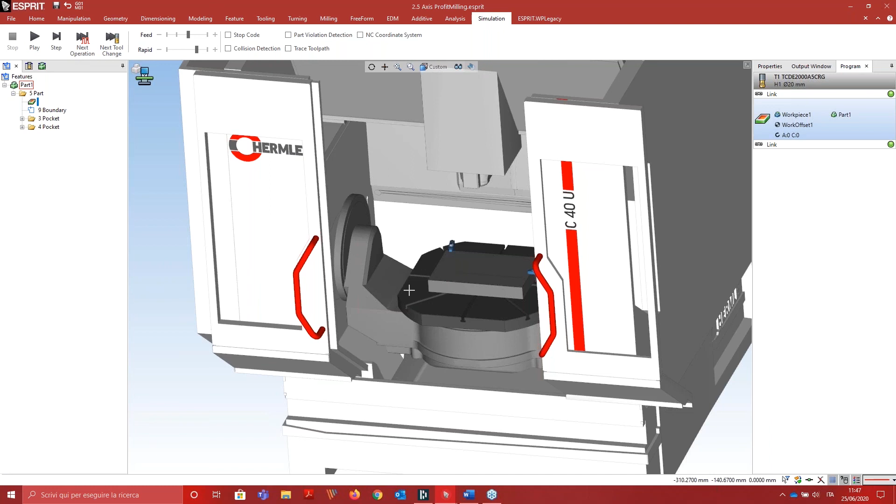And I think really that what we saw this morning is a new way of cutting and roughing, thanks to the tool from Kennametal and thanks to the ProfitMilling cycle. So the combination is really impressive. I think it's really important, also based on Industry 4.0, that is forcing us to be closer. It means that hardware, like a machine tool or tools, and software need to work together. So if we want a better process in our manufacturing, definitely we need to work together. So our guest partner this morning, Kennametal, is really helping us to use the tools in a better way for our customers, and on our side with the ProfitMilling cycle, we are helping them to use their tools in the correct way. So the combination is really helpful to all our customers.